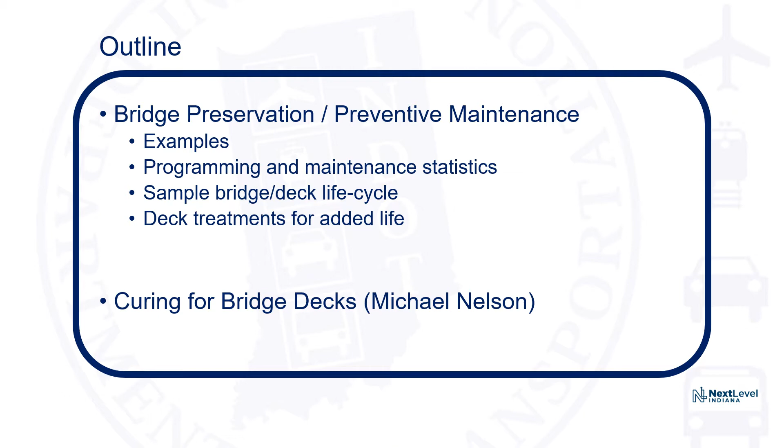To achieve our condition targets for bridges, INDOT established a statewide 20-year plan, which provides a long-range plan of our bridge and large culvert assets. We use this 20-year plan to help come up with our short-range 5-year capital program. In addition to the capital program, we have a 5-year scheduled maintenance plan in place, which we use to perform in-house and contracted maintenance on thousands of structures each year.

INDOT's bridge preservation program consists of rehabilitation and preventive maintenance projects. The rehabilitation projects consist of the major work types such as deck and superstructure replacement, substructure rehab, and bridge widening, which serve to restore the structural integrity or correct safety defects. These rehabilitation projects are typically done throughout the 5-year capital program by outside contractors.

Preventive maintenance projects are performed to prevent, delay, or mitigate deterioration, and these are a mixture of condition-driven and scheduled projects. The condition-driven projects can be done by INDOT maintenance or outside forces, and the scheduled projects are usually done by both, although they typically are performed by in-house maintenance.

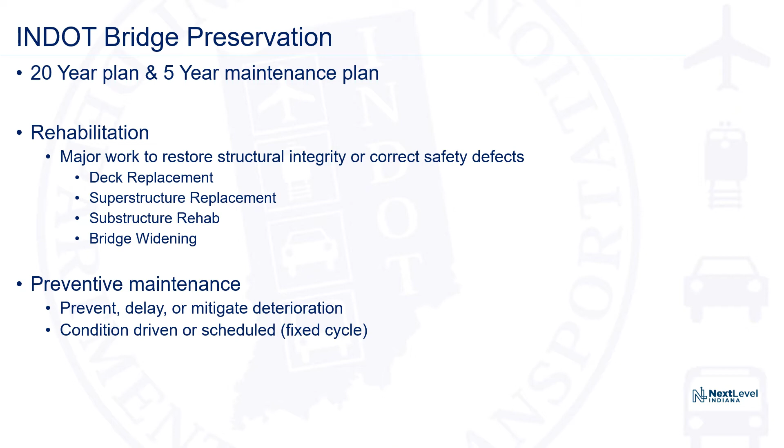This slide shows some of the many condition-driven preventive maintenance activities. It includes such treatments as bridge deck patching and crack sealing, joint repair, and polymeric and rigid deck overlays. It also includes various superstructure and substructure rehab repairs, channel work, and other miscellaneous treatments such as slope wall, railing, and approach slab repair or replacement. These maintenance treatments are also referenced in Chapter 412 of the Bridge Design Manual.

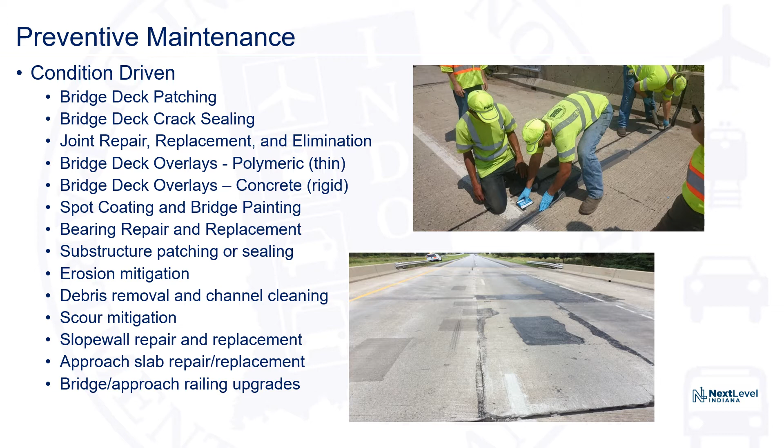We also have our scheduled or cyclical maintenance treatments. This includes treatments such as bridge deck, drain, joint, and superstructure cleaning, bridge deck sealing, and brush control. We typically perform bridge cleaning and flushing annually and tree and brush removal about every 2 to 3 years as needed. Our deck sealing program is currently performed at around year 5 after a new concrete deck is placed, and we don't perform these again after a thin or rigid overlay is placed.

However, we used to have a concrete provision during construction which says that in lieu of sealing bridge decks, pozzolans were allowed to be put in decks. Many contractors were adding these pozzolans to forego the time-consuming and time-dependent silane penetrating sealer. INDOT also saw the benefit to using pozzolans instead of the initial sealers, which tend to wear away quickly, so they recently updated the specs to require the addition of the pozzolans.

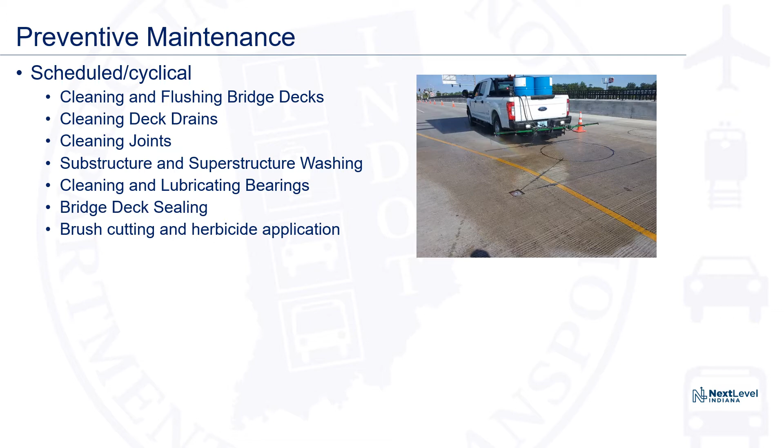And since this change, we're now looking at trying to get the initial silane sealer put on the decks around year 1 or 2, and again 5 years later in years 6 or 7, prior to installing a polymeric overlay around year 11 or 12.

INDOT maintains just shy of 5,800 bridges and 8,800 large culverts. This chart shows a summary of the various capital programming projects for these bridges and culverts currently in the program for years 2021 through 2025.

Of the approximate 3,200 total projects in the 5-year program, around 43% are dealing with deck-related projects. This percentage increases to almost 60% if you remove the 859 small structure projects shown on the last line. So INDOT realizes the importance of protecting the underside of the bridge, and we devote a large percentage of projects towards sealing the decks and deck-related treatments to keep harmful salt away from infiltrating the deck and the components below.

We also realize the importance of preventive maintenance projects such as those mentioned on the previous 2 slides. The blue numbers to the right show that roughly 1/3 of our capital budget is spent on these preventive maintenance projects. This does not include the projects performed by our district maintenance forces, which is summarized on the next slide.

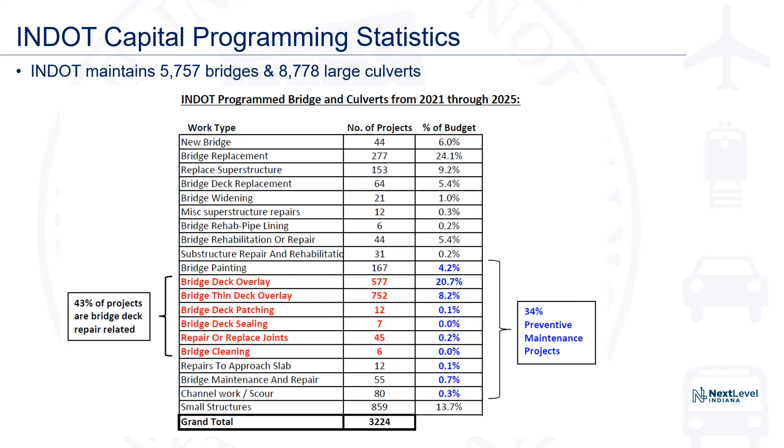This chart shows a summary of our in-house INDOT bridge maintenance activities for the past 5 years. These activities are completed on various cycles and are not eligible for federal funds.

Bridge deck sealing is normally performed in conjunction with deck crack filling if needed. We also have permanent and temporary deck patching, performed as needed. Cleaning and flushing items are done annually on most bridges, and brush cutting is done every 2 to 3 years as needed.

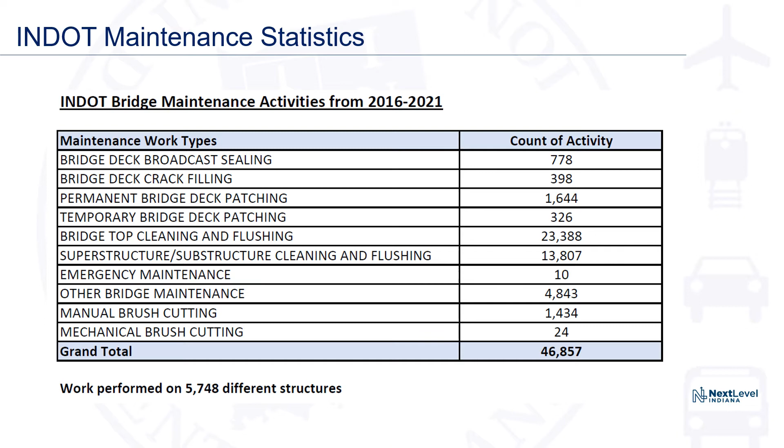In all, our maintenance crews perform work on almost all of our bridges over a 5-year cycle, a large portion of which receive attention every year.

This flowchart diagrams a sample deck life cycle for one of our typical bridges. After the initial bridge construction, we install the deck sealer, and this silane sealer is applied 1 to 2 times before any overlay is placed. It's not typically applied again after an overlay.

For some bridges, the polymeric overlay is then placed. We just started using these around 10 to 12 years ago, but expect them to last 12 to 15 years or longer, and hope to be able to install up to 2 prior to needing a rigid overlay.

Rigid overlays are typically on a 20 to 25 year cycle. Most bridges might see 1 to 2 of these, followed by a deck replacement or superstructure replacement, depending on the structure type and the deck condition.

We like this replacement to happen close to the bridge midlife, so we can get another deck life cycle similar to what's shown here prior to having to replace the structure.

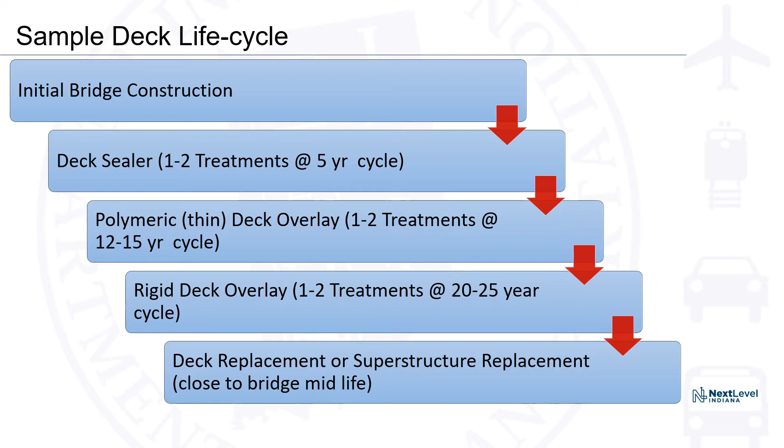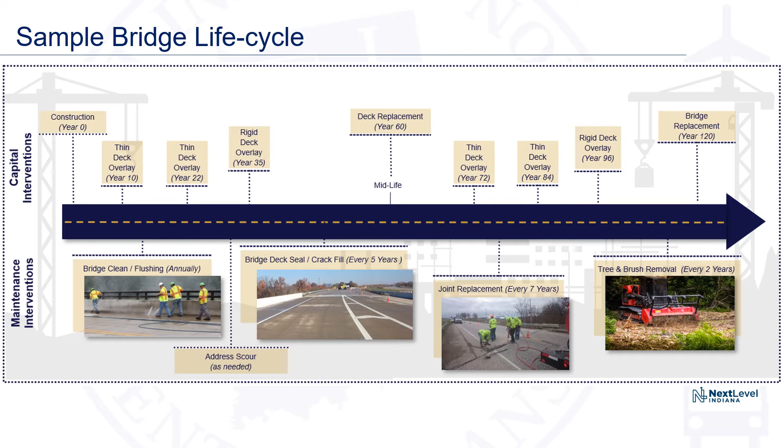Not every bridge is created equal, and the sample life cycles just displayed are not the same for every structure. There are many variables that can shorten or prolong the treatments or change them altogether.

The bridge type and bridge details are important, as well as the concrete and rebar material specifications. The design quality, plan quality, and construction quality all have an impact.

Other variables are the overall traffic and truck traffic amounts, maintenance and preservation frequency and quality, and environmental considerations. Maintenance of traffic is another consideration.

If work is being done on a highly traveled corridor, it might make sense to do a treatment a couple years early and lose a little service life in order not to use the same MOT setup 2 years later along the same stretch of road.

Depending on the road category, INDOT is willing to move a bridge project up anywhere from 2 to 5 years early in order to do the work in the same corridor as another road project.

However, moving a project out to a later year does not follow that same rule and is more dependent on the structure condition and whether it can safely last the additional time.

The main goal is to attempt to match up with the pavement timing and make it 10 to 15 years before we need to come back and do the next capital treatment.

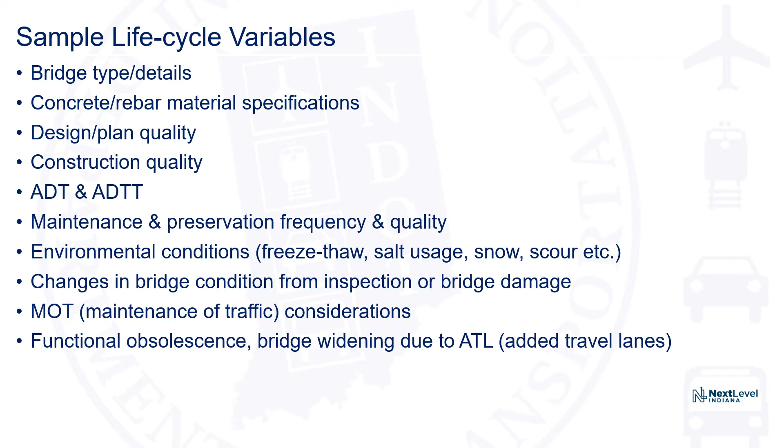To sum up the standard deck treatments that INDOT performs to achieve added life, the common ones we use are an appropriate balance between routine maintenance and use of polymeric and rigid overlays. However, INDOT is always testing new materials and treatments to try to increase the life of our bridges.

We have used polyester polymer concrete, or PPC, overlays on a couple of bridges and are currently in the evaluation period on these. Our maintenance staff has a mobile trailer set up for performing epoxy injection on concrete decks which contain rigid overlays that have debonding, where we hope to get an additional 5 to 10 years of service life before the next treatment is needed.

We've also investigated the use of different deck rebar and concrete coverings during construction. In fact, we're using stainless steel deck rebar with an initial LMC overlay on the new decks in the North Split interchange in downtown Indianapolis, which will be constructed over the next few years. We've also made concrete material advancements, such as requiring pozzolans in the decks at construction, and we're currently testing some advanced deck curing methods with an E5 admixture.

But Mr. Nelson is the expert on concrete, so I'm going to turn it over to him so he can discuss bridge deck curing in more detail.

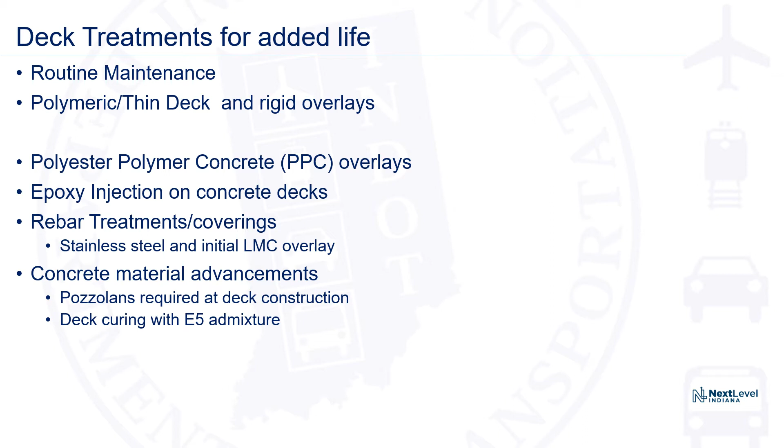INDOT's standard curing process for bridge decks has historically been a 7-day wet cure. After the 7 days, the curing is removed and that's it, the curing stops. In 2018, we had a contractor who, due to a misunderstanding of the specification, actually applied curing compound behind the screed.

They did a wonderful job applying the curing compound. They got it on white as a sheet of paper, as we are accustomed to referring to now. Again, they did a good job; there was just a misunderstanding that was not allowed for in INDOT standard specs.

So when we learned that this had happened, I certainly had a bit of a panic moment, and we required the next day that the contractor go out and put the water curing in place for the 7 days as we would traditionally have done.

This deck was unique in that it had 2 large closure pours over the piers, and those were done later. So on either side we had the curing compound with the wet cure over the top, placed 24 hours later, and the closure pour was done with the standard wet cure.

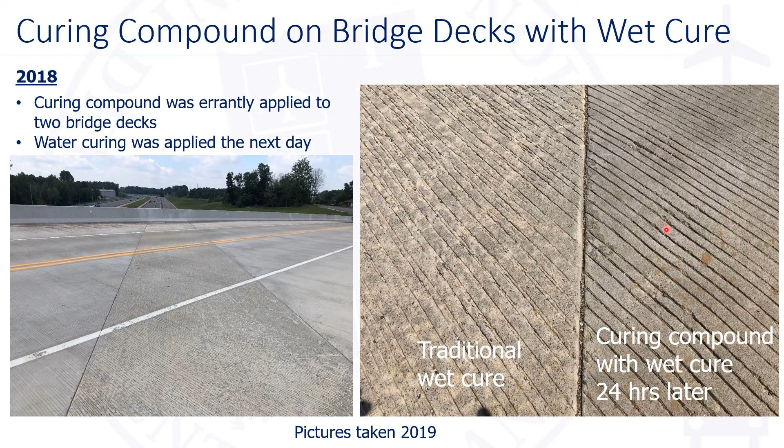It's also noteworthy that other DOTs do deck curing in various ways. Some states actually do this on purpose - they put the curing compound on behind the screed with the water cure on top. So what I had discovered isn't exactly anything new; it is done by other states. Some states actually just do the water curing for 7 days, and once the water curing is removed, they then proceed to add curing compound. Neither of those are things INDOT has traditionally done.

So based on the observations from 2018 that curing compound had benefit, we decided to try it on purpose in 2019. We partnered with Milestone and poured 2 bridge decks on I-865, one eastbound, one westbound. We did the curing compound behind the screed, and applied the water cure the next day within 24 hours, white as a sheet of paper, as we're used to saying. Again, it all was positive.

The contractor liked it - they perceived less risk to damaging the surface at the time of placement. There was less pressure on them on pour day, so it was easier logistically for them. From INDOT's perspective, certainly more timely protection behind the screed, and everything just seemed to go more smoothly.

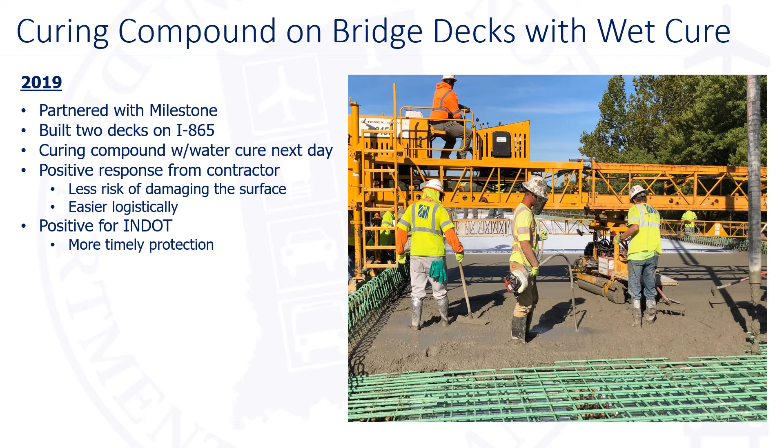So overall, we tried it. The cracking was minimal, if any, and Milestone ultimately continued on with this process and built several more of these decks even into 2020. Again, the response has been favorable, and we really haven't seen any negative side to that. We continue to see benefits from the curing compound. So in 2020, we decided to try something new yet again.

I'd heard rumblings over the past 4 or 5 years about a new admixture developed around the Indianapolis area called E5 internal curing. The thought was that if the admixture does half of what it's supposed to do, perhaps if we use it in conjunction with curing compound, maybe we don't even need water curing. So I pitched that idea to one of the area engineers, Mike Koch in Fort Wayne, and he was interested. Then we had a contractor interested, Dan McCoy at RL McCoy. So one thing led to another.

We did some lab trials at my office and tried some things to learn a few things, and then we decided to go forward on a deck. So in June, we tried it.

We used the admixture and curing compound only. No water was applied to the deck whatsoever. Just the curing compound and the admixture, and it worked. There was minimal cracking observed. Just over the piers in the negative moment regions we saw some hairline cracks in the flow lines, but that's not uncommon. We saw favorable strengths and good pumping. I'll get into some of the other benefits here in a minute, but again, everything was positive.

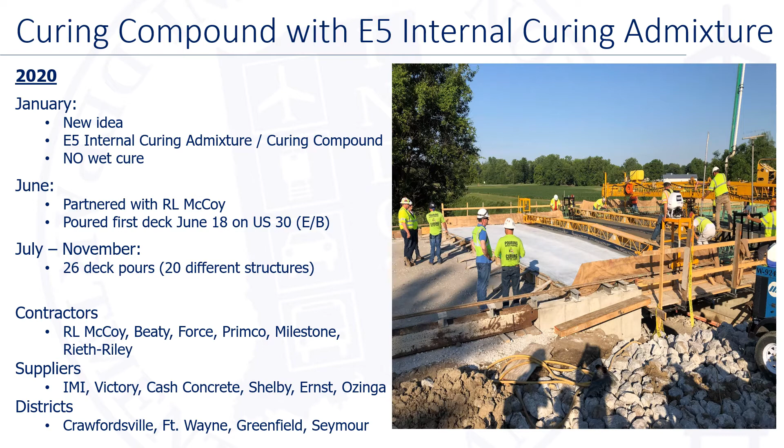The contractors are all required to use a motorized sprayer. One contractor tried it in 2019 with a hand pump sprayer, and you just can't put enough curing compound out with a hand pump sprayer—it's way too much work. These motorized sprayers do a good job of really painting it white.

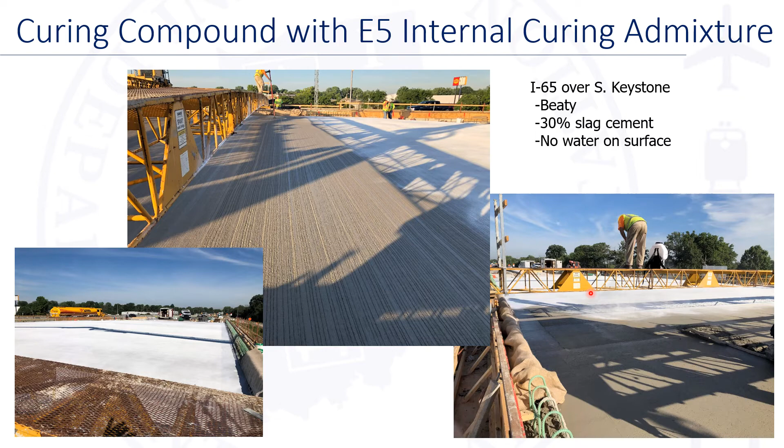So now I'm going to get into a little bit about what the admixture is. The term nanosilica has become a buzzword in the concrete industry. It's used to refer to a lot of things, but it's a bit of a buzzword. Silica fume is a byproduct of the silicon manufacturing industry, something we've used for decades. We use it in our silica fume overlays. It is basically a byproduct of silicon manufacturing. It's pozzolanic, a fine powder, and it's 57 times finer than your Portland cement in terms of surface area—there's a lot more surface area due to the smaller particle size.

When we talk about nanosilica, nanosilica is actually a man-made product from salts and metals in a tank. It is not a new material. Nanosilicas have been around for decades in other industries, they're just somewhat new to the concrete industry. They are also just pure silica—both of these things are just silica. The big takeaway is it's the size of the particle.

These particles, where we were talking about 57 times more surface area with a smaller particle size, now we're talking about a nanoscale—a very small particle, with about 1,700 times more surface area than Portland cement or fly ash. So again, same chemistry, similar chemistry. It's just silica, just very small silica.

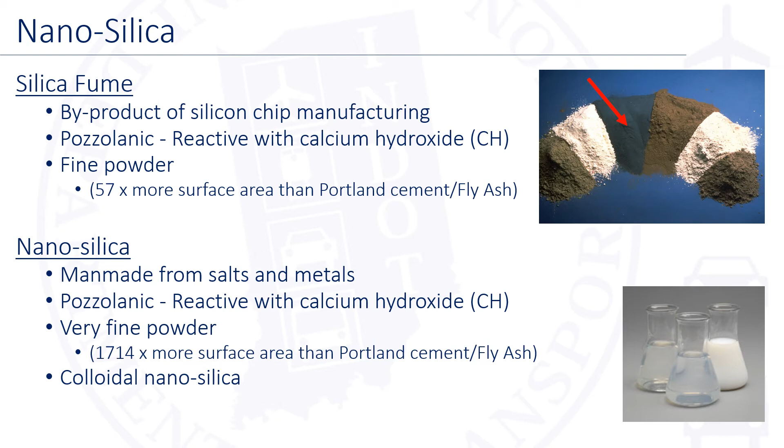Now it can exist as a fine powder, however that doesn't work in concrete—you can't get it dispersed. So what we're talking about is colloidal nanosilica, and a colloid is just a suspension in a fluid. Milk is a colloid of fatty particles in a solution; this is basically the same thing—very small silica particles permanently suspended in solution.

A small disclaimer: this is not intended to be a video or a marketing campaign for this E5 internal curing admixture. I only want to explain to you what INDOT has done and tried with this particular product.

The reason it's come to INDOT is because it has this product that was developed by an Indiana company named Specification Products. They developed it, and it had been used and refined here in the Indianapolis area in the commercial world for the past few years. Based on everything I had previously said about my interest in curing compounds and learning about this, it was worth a try. So that's kind of why I'm the one talking about it, and why from a DOT perspective, perhaps we were closest to it, because it's kind of growing up here in Indiana.

So it is a colloidal silica admixture, as I've mentioned before. It is a bit modified. This is a patented product. It is a unique product. I do want to mention the batching sequence is absolutely critical in order to make this work. It's something the ready mix industry understands, and how to use the products. They understand how to use all their products, but the batching sequence is critical in this particular product.

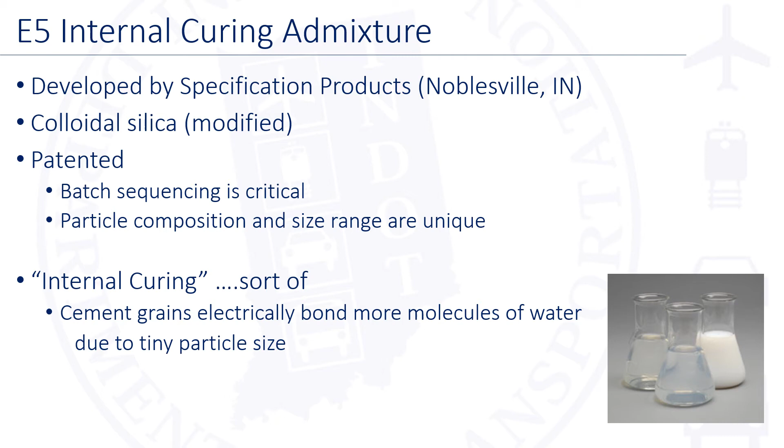The particle composition and size range are a couple of things that are also unique to this particular product. So internal curing, I say 'sort of,' because when I first heard them using the term, I was a little skeptical. Traditionally in the DOTs, internal curing nationally has meant using a saturated lightweight fine aggregate to basically embed a reservoir of water that then gives up the water slowly over time to provide an internal curing mechanism. Due to the small size of the particles I mentioned earlier, this product has the effect of binding more water molecules to the grains of cement. So it has a similar effect, but that's a bit of a marketing term to use internal curing. But the more I've learned about it and seen it, I don't really have a problem with the term. It just isn't done. What it's doing is not what we traditionally would have considered internal curing.

This slide summarizes the benefits and things we had hoped we would see by using the E5 internal curing admixture. We did consistently see improved strength north of 600 psi flexural in 2 to 4 days. We saw good compressive strengths. Those were done simply by taking the samples and duct taping the molds shut and leaving them for 28 days to see what would happen. We were getting around 6,000 psi, which is the design strength of the mix, in 28 days.

I had seen in preliminary testing in the lab, before we started all this, that when I made a control mix and an E5 mix and put them in the tank for 28 days, basically we didn't see any difference. It seems that in lab conditions, when everything has all the water it needs, there really isn't any difference. E5 seems to have its effect out in the real world, where atmospheric conditions and water loss come into play. So it seems to shine out in the real world, but in the lab it doesn't really show that much difference.

We saw minimal to zero cracking on these decks. To date, minimal has been reported, if any, on some of them. I went out and looked at one of the decks in December, and there was again no cracking, and that's certainly a positive for us.

Reduced permeability and absorption is something I'll talk about here in a minute on another slide. That's been validated. Reduced calcium hydroxide is something that we have not really proven yet, but there is testing being done by others. Specification Products has initiated that, and those reports are coming here in the next 90 days or so, and I look forward to seeing the results. But I have seen preliminary data that seems favorable towards the reduction of calcium hydroxide.

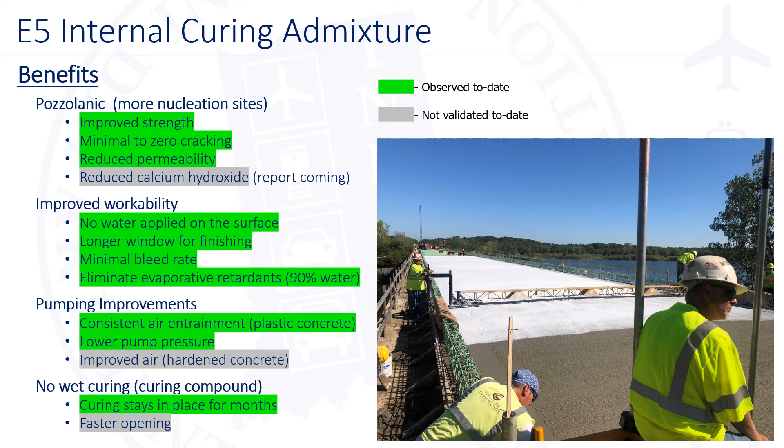The curing stays in place for months. I looked at one of the decks from '19 that we did, and the curing compound was put on in August. I looked at the deck again in December, and there were clearly still remnants of the curing compound in place. And faster opening to traffic is something that we have not done to date, but we are looking at.

So we know we saw positive benefits during placement with the plastic concrete, but we still needed to validate what we were getting in the hardened concrete. I took 10 cores, 2 cores each from 5 different pours. 3 of those cores Purdue looked at under the scanning electron microscope. Now, these are fairly young cores - they were 24 days, 30 days, and 48 days at the time of coring. So again, very young concrete we're looking at here. But overall, the summary was that the concrete quality is good.

Now, a surprise was that the air void system in the hardened concrete ranged from good to poor. One core had good air, one was kind of in the middle, and the other had poor air entrainment. That was really surprising based on the observations and testing we did of the plastic concrete. The analysis was that we believe the autogenous shrinkage and the stresses developed may have destroyed some of the smaller air bubbles, and in general, the lack of moisture, or competing interests for water in the mix, perhaps did not allow the air void system to develop as well as expected in a couple of the cores. So that was a bit of a surprise.

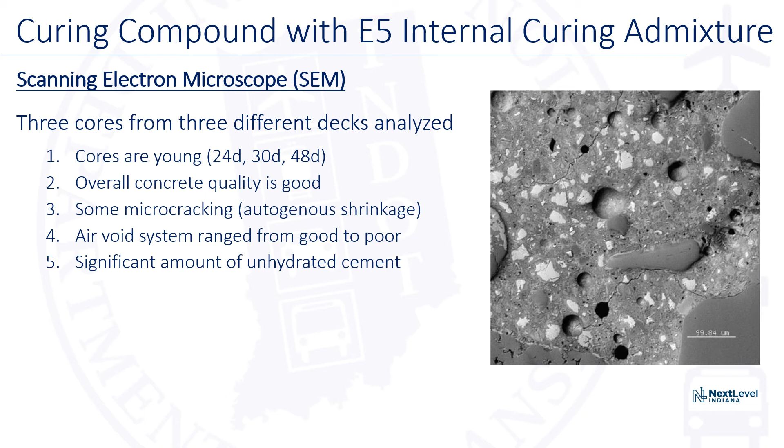And as I mentioned, there's a significant amount of unhydrated cementitious material. So the takeaway from this was that, again, we got good concrete - we just feel like we need a little more water in the mix. Purdue also did absorption testing per C1585. Now, that test typically requires a 4-inch core.

The 6 cores analyzed from us were only 2 inches in diameter. Professor Olek used some older cores to develop a method, using 4-inch and 2-inch cores, to see how things would compare to our 2-inch cores. The reference specimens on the right were older cores, while our cores, which were fairly young, are shown on the left.

A number below 2 on that I value is a good number. Our numbers were below 2 on 5 of the cores. There was a 6th core that was removed because the data was a bit of an outlier, so he took that out. Our values were all well under 2 and compared favorably to the much older specimens of both 4-inch and 2-inch diameter. Again, this is all very favorable.

In light of the fact that the air void system on a couple of the cores was not ideal, when you look at this absorption data, it's very favorable. So taking everything into account, the conclusion is that we got good concrete out of this methodology.

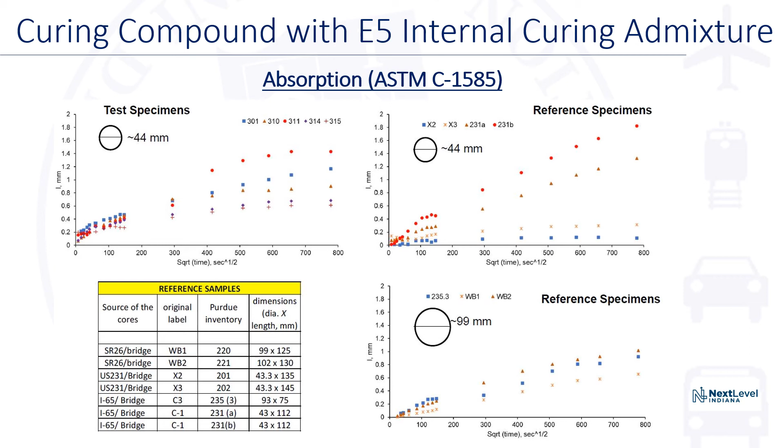We investigated and realized it was really cracking in the curing compound itself, and there were no cracks in the deck. This can happen if the curing compound is applied too soon and there's moisture underneath. You need to wait for the sheen and any bleed water to dissipate before applying the curing compound. In cooler temperatures it takes longer for that to dissipate, so you need to be aware of applying the curing compound at the right time.

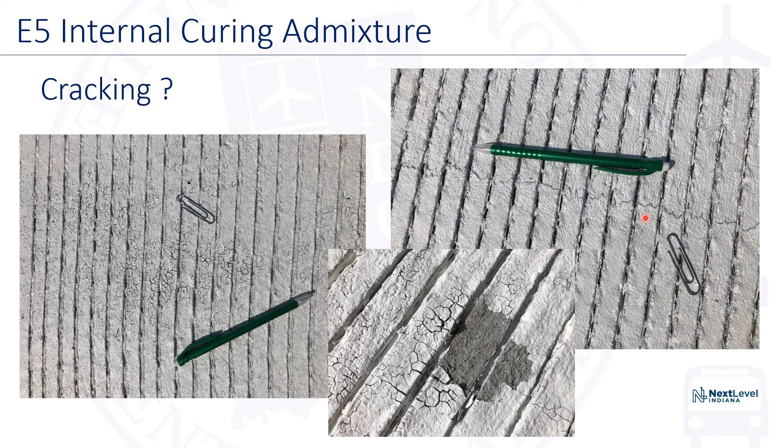Based on the findings, field observations from 2020, as well as the core data, INDOT is planning to move forward at this time with the process. At the time of recording this presentation, it is a draft memo that may or may not already be issued by the time the presentation is given. But at this time it is a draft, so anything I'm about to show you is subject to change.

The key points to the memo in the next 4 slides: this is a unique process tied entirely to the E5 admixture. We are not considering other similar admixtures—it's strictly tied to this E5 admixture. It is going to be for bridge decks, slab bridges, or reinforced concrete bridge approaches. We are not adding E5 to other structural elements at this time; it's strictly for bridge decks, slab bridges, and RCBAs.

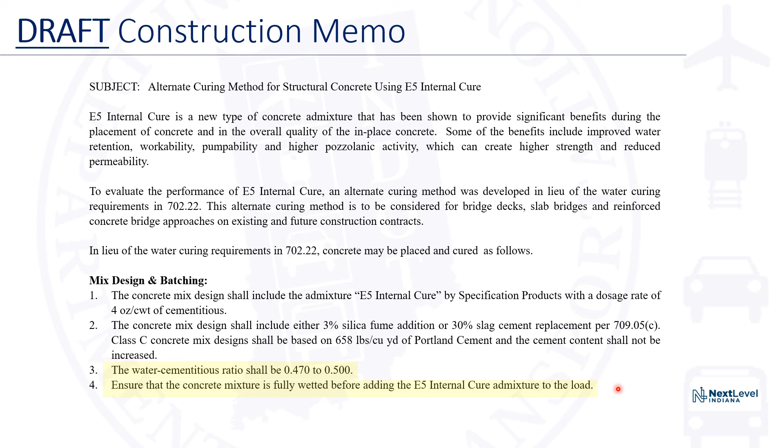The next section of the memo addresses items done during placement. These are 4 things done during all 27 of the pours in 2020. We require that a representative from Specification Products be on site—I think this has been a significant part of our success so far. They have been physically present at the job site and at the plant to assist, and that has been very helpful.

Water shall not be applied to the plastic concrete surface for any reason. We're putting it in writing, and to date I was surprised at how well this was received. But once the contractors saw how well the mix was behaving, this really became a non-issue.

In writing, we state that we're not going to apply water to the surface for any reason. I'm also saying that products marketed as evaporative retardants or evaporation reducers shall not be used. As I mentioned earlier, we're pushing to get these out of our culture. More often than not, they're used incorrectly, so we are clearly stating we don't want them here.

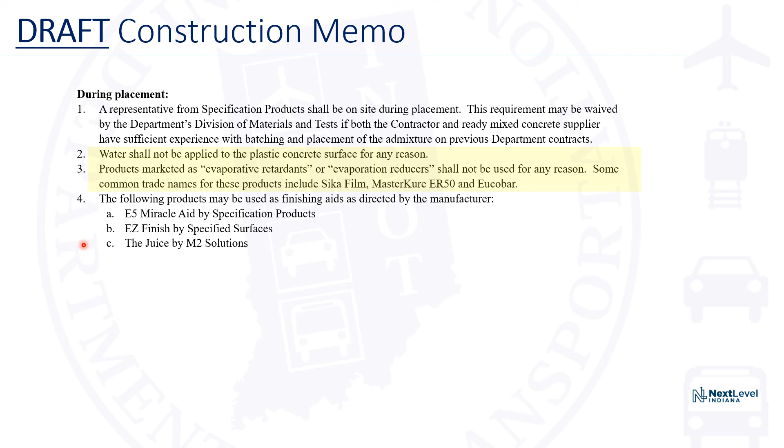The finishing aids can be used. To date, I think 26 or 27 pours did use the E5 Miracle Aid. Very little of it ends up being needed, but it does slick up the surface. These other two products are similar technology that could also be used. I know the M2 Solutions product is available; it tends to be marketed more to the south, but any of these three products could be used if desired.

So this section of the memo addresses items after placement, specifically the application of the curing compound. We require the motorized sprayer, as I mentioned earlier, two coats applied white as a sheet of paper.